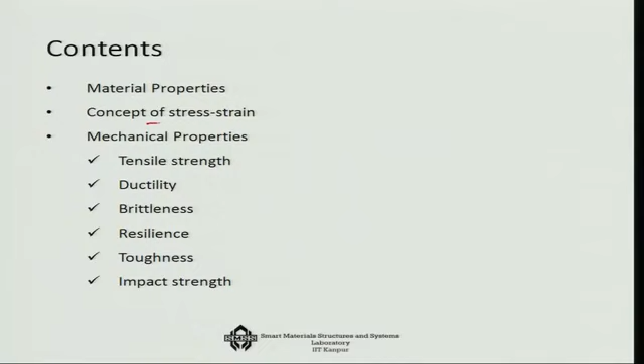We will describe how these constitutive relationships are built. Then we will talk about certain material or mechanical properties of the material which are very relevant towards this direction. For example, the tensile strength, the ductility, brittleness, resilience, toughness, impact strength of material. These are the things that we generally need when we have to develop a product or an engineering system which has to sustain a degree of mechanical loading.

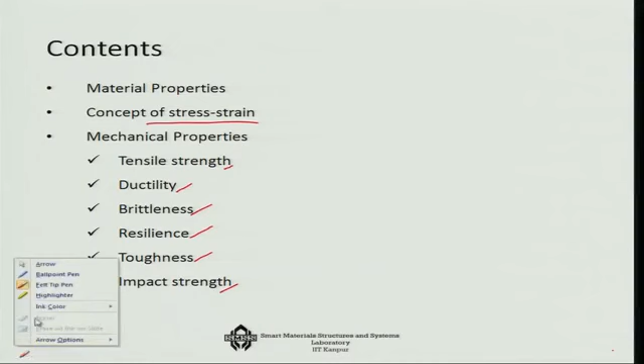So, first of all, let us look into broadly the material properties. In the last lecture, I have told you broadly about the domain of materials. Now, we are talking about the material properties that one has to consider. So, towards that direction, there is what we call an 8 parameter based grading of a material. The first in this direction is, of course, you have to always keep in mind the economic and environmental effect, because if the material is very expensive, then it is of no use for a mass production system.

Just for an example, suppose you need a very high stiffness in a particular mechanical system. Now, diamond is having the highest stiffness, something like 1200 gigapascal. But can I make a mechanical system out of diamond? No. So, that is what we have to keep in our mind. Diamond is, of course, an extreme example, but the price and availability is a very important aspect in terms of choosing a material. We will cover these things in one of the talks. I will tell you the current prices and availability of the materials in the Indian context. So, that is one important point, whether the price is affordable for a particular engineering system.

Now, once again, say for example, you are making a screwdriver or you are making a nail cutter. The type of material that you can afford, in comparison to making an automobile, will be definitely of inferior grade. That means, the material cost is less important for products like automobile or aircraft, for example. So, you can afford slightly higher grade of materials there. So, that is why the price plays a very important role.

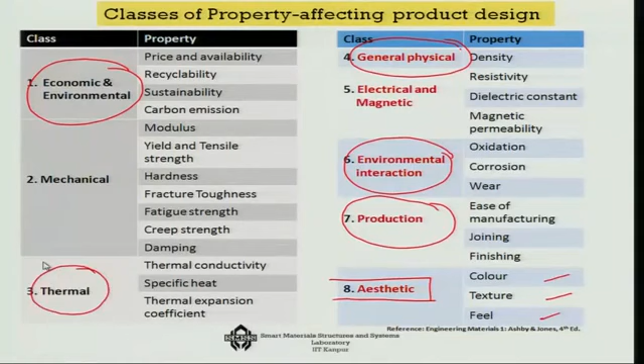So, that is about the overall material properties. Now, let us look specifically into the mechanical properties of the material. There is actually a very large list of mechanical properties, but I have chosen a few very important ones which you will need for day to day mechanical design: the strength of the material, the stiffness, which is governed by the modulus of elasticity, then the plasticity from the forming point of view, ductility

and malleability. One common point you often come across is that ductility and malleability are not the same. Both of them refer to how you are deforming a material, mainly plastic deformation, but while ductility refers to deformation under tensile conditions, malleability generally refers to deformation under compressive conditions.

So, ductility, for example, refers to whether I can reduce the thickness of a wire as I apply a large tensile load. Can I draw a very thin wire from a cylinder? So, if the material has good ductility, you can draw a very thin wire out of it. So, that is in the context of tensile loading.

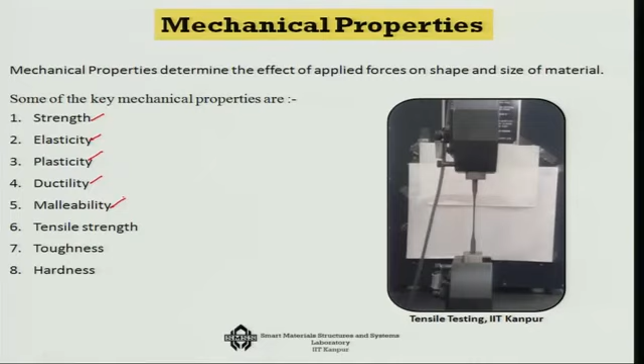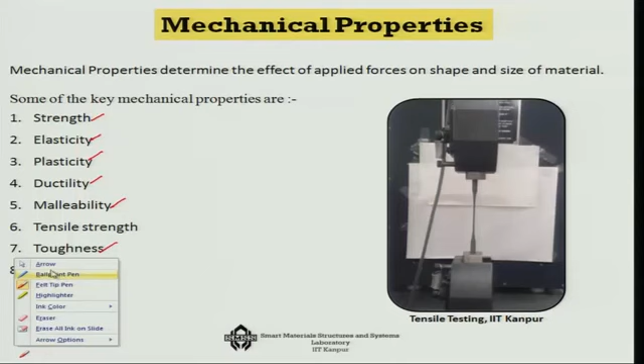Then of course, we talk about strength, specifically the tensile strength, because that becomes important, and the toughness and the hardness of a material. So, these are some of the mechanical properties which we will be discussing in much more details. Okay. So, before I talk about the strength, I should talk about the concept of stress and strain, which is very basic and important for any mechanical component.

Now, the way we will define stress here, which is the very elementary definition of it, is that it actually depicts the internal resistance per unit area in an average sense that acts on a material when you are trying to deform a material. So, for example, if you use a tensile testing machine, then you will be taking a sample where you are actually going to apply the force and deform the material, like you can deform it either in a tensile force system in this manner, where you are actually pulling it apart, or you are compressing it.

In both the cases, you have an idea of how much of force you are applying, and you know what is the area of cross section of the system, okay? The initial area of cross section of the system. So, in an average sense, the force per unit area will give you the stress. Now, the SI standard unit is Newton per square meter for stress, and that is also called Pascal, named after the famous mathematician who has a very important contribution in terms of hydrostatic stress. Now, even though Pascal is the unit, generally the type of systems that we come across will have something like kilopascal or megapascal or gigapascal kind of range of stress.

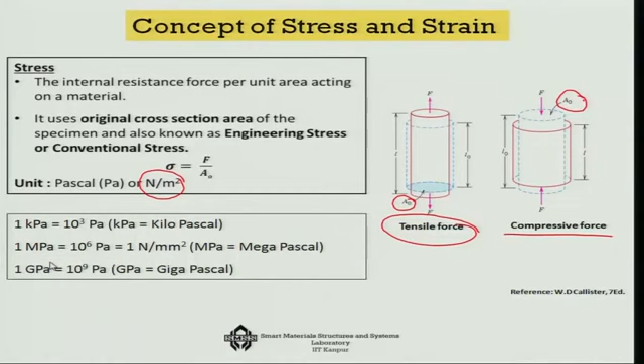So, thus you can understand what is stress, which is the internal resistive force, as I told you, averaged out for an area over which this force is working on, and the unit of it, that is the Pascal. Now, what is actually the strain of the material? The strain is defined in terms of the change in length per original length of the material. Now, here if we think that the area of cross section is not changing or the change is small in a certain range, then the strain is actually the engineering strain or a conventional strain or a normal strain, which is the change in length over the original length of the material.

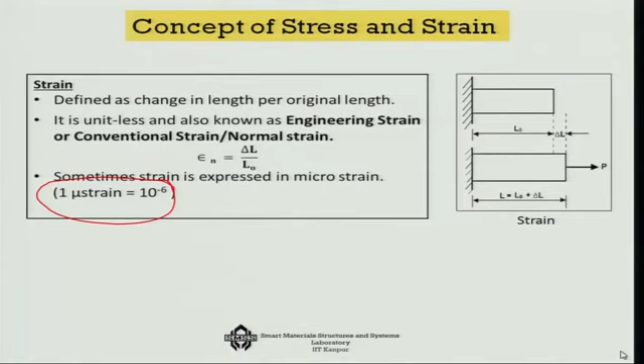So, that is what is your strain, and generally this strain is very, very small. So, the strain is measured in terms of 10 to the power minus 6, or micro strain. So, these are the two very basic important points about stress and strain that you need to know. Now, stress need not be always tensile in nature or always compressive in nature. There can be stresses which can be shearing in nature.

So, you may also express it as tan theta. Now, whenever this is very, very small, tan theta becomes almost equal to theta, and hence for small strain conditions, shear is often expressed in terms of the angle theta. Now, there are many day to day examples.

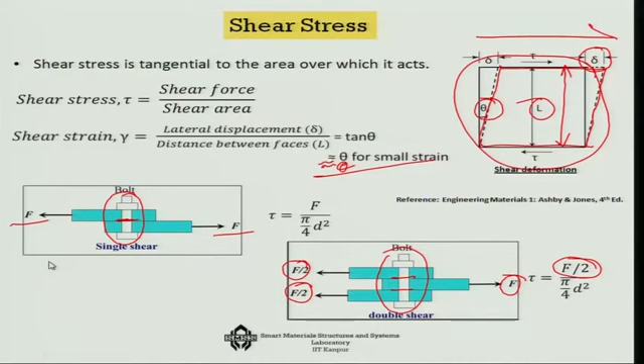So, you can make many such changes intelligently in a system, so that the shearing stress comes down, and thus it gives you a stronger system with a better life. So, that is what is the shear stress. Now, there is also another manifestation of shear stress, we call it pure shear. This happens in terms of torsion, which is a variation of pure shear.

Now, in torsion a structural member is twisted. For example, in this case you are twisting this member in a manner that it produces a rotational deformation or rotational motion of the top surface with respect to the bottom surface where it is held, let us say it is fixed at this point.

So, there is again a relative movement between the two surfaces, standard of any torsional situation, and they are generally governed by this standard relationship for very small twisting angle. When the twisting angle is not very high, torque over the polar moment of inertia, T/J, equals the shear stress tau over r, and that equals the shear modulus G times phi over L, where phi is the angle of twist and L is the length of the sample.

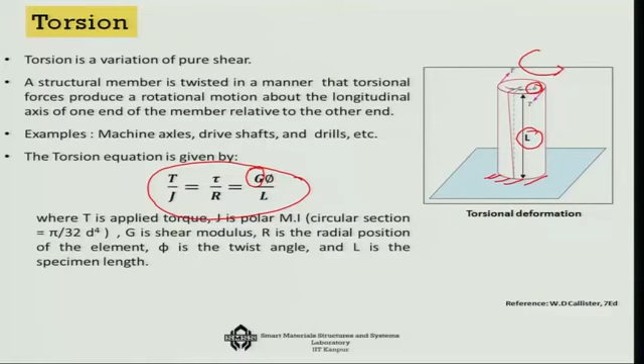So, one can find out the shear stress corresponding to the pure shear condition, provided you know the modulus, the twisting angle, the radius of the shaft and the length of the specimen. So, that is a special case of shear, which is called torsion. Where it is important: machine axles, drive shafts, aircraft wings, or drills, where torsional systems are very heavily used.

Now, what are the other common states of stress? In day to day experience you must have seen simple tension in something like pulley based systems, or in a column you will see simple compression. But there are other cases, for example a balloon or such hydrostatic bodies where you get a biaxial state of stress, expansion and contraction, or hydrostatic pressure, or cases where you see pure shear. These are all cases of stress in our day to day experience.

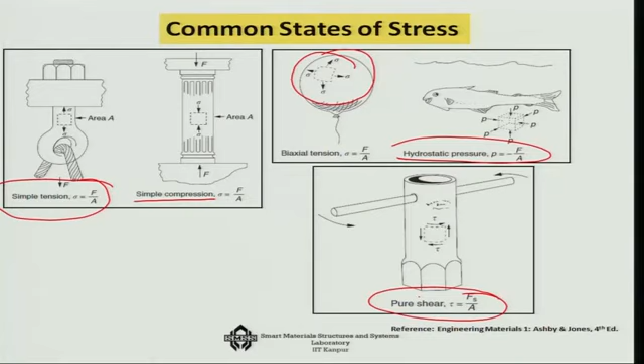So, these are certain common states of stress, and this is where we will finish today's lecture. In the next lecture, we will talk about the concept of stress and strain and the constitutive relationship in much more depth.